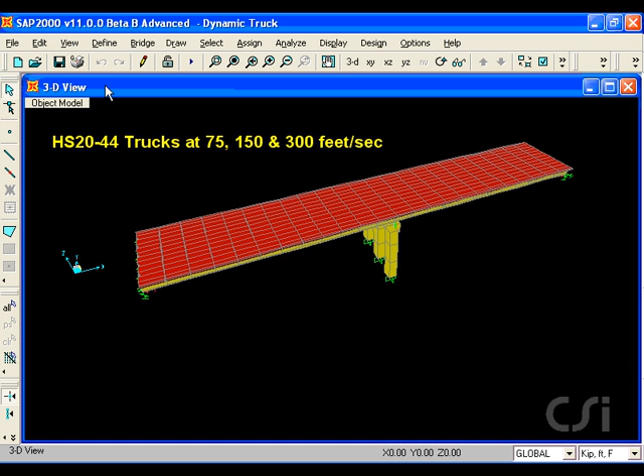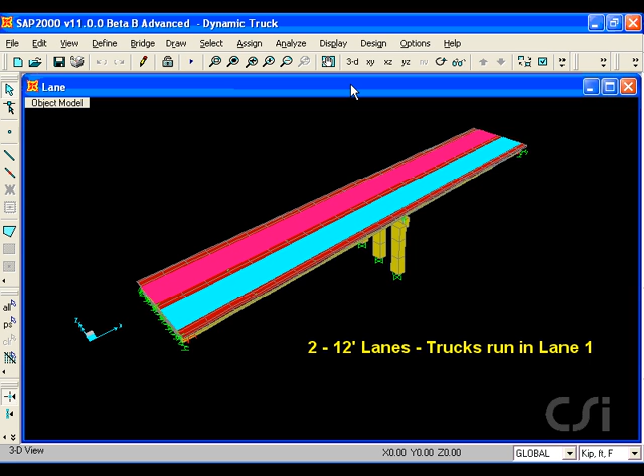This tutorial will illustrate how a moving vehicle can dynamically excite a bridge. We will run an HS20-44 truck at 3 different speeds to see the different responses. Our composite bridge is 2 spans, each with a length of 100 feet. It is 36 feet wide, constructed with steel girders, cross bracing, and a concrete deck. It has 2 12-foot lanes, but we will only load lane 1.

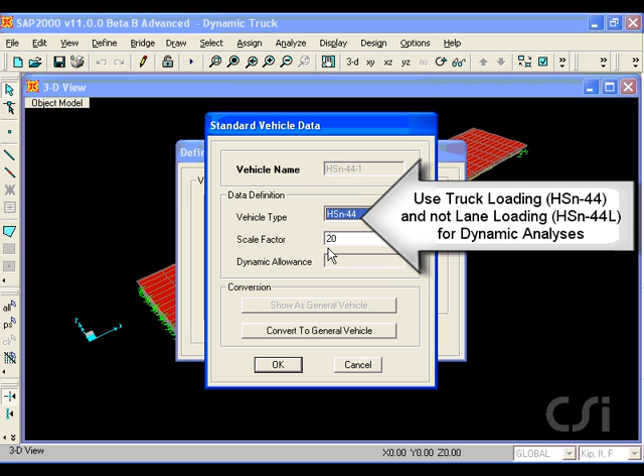We start by defining our truck. When using a vehicle load for a dynamic analysis, it is important to use a truck load and not a lane load. We next add our vehicle to a vehicle class.

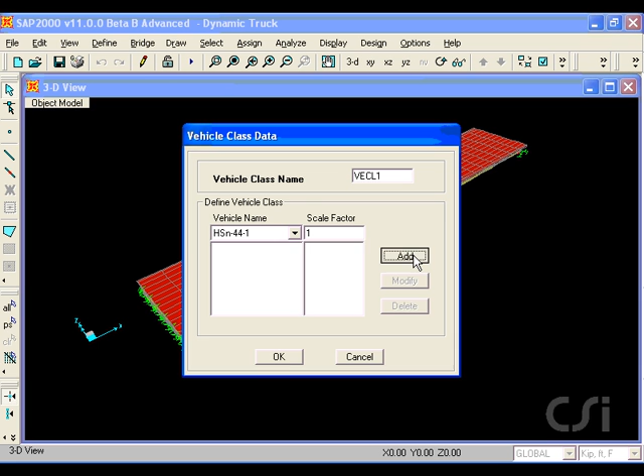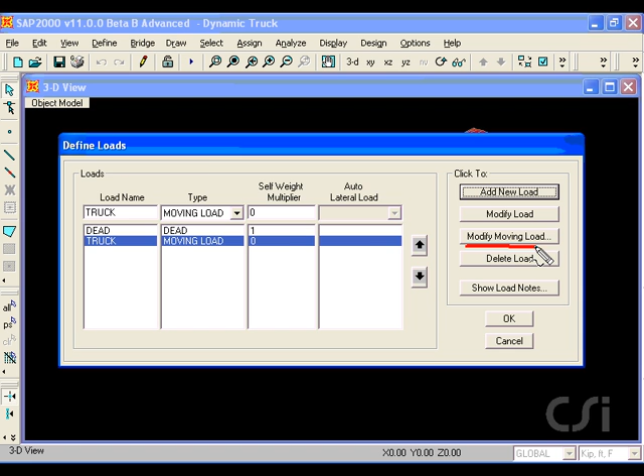Now we will define our moving load case, which we will call truck. Clicking on the Modify Moving Load button allows us to specify how the trucks will run over the bridge. Here we can specify the vehicle, the lane, the start time, which for the first truck will be 0, and the speed, which will be 75 feet per second for the first truck.

For the second truck, the start time will be 6 seconds, and the speed will double to 150 feet per second. For the third and last truck, the start time will be 11 seconds, with a speed of 300 feet per second. We are using speeds higher than typical to cause a significant excitation of the bridge. We will use a 15-second duration for the load and a 0.05 second step.

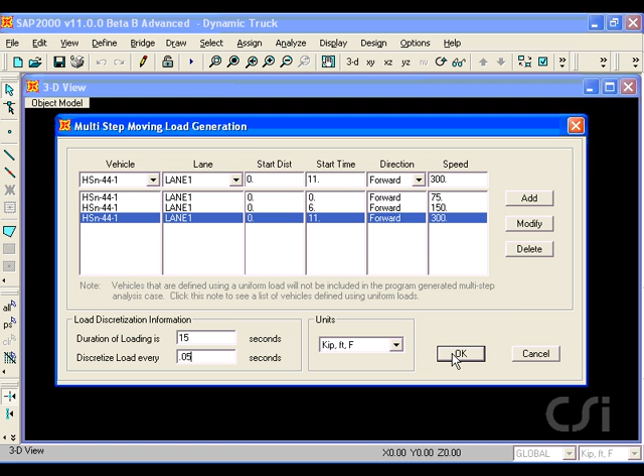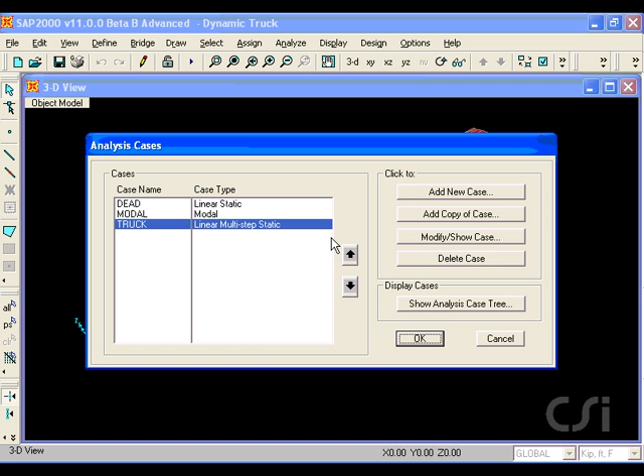The last step is to modify the analysis case. Note that a default case for truck was created as a multi-step static case. We will change this to a time history analysis so that the dynamic behavior will be included. We will leave it as a linear analysis, but change the time history type to direct integration.

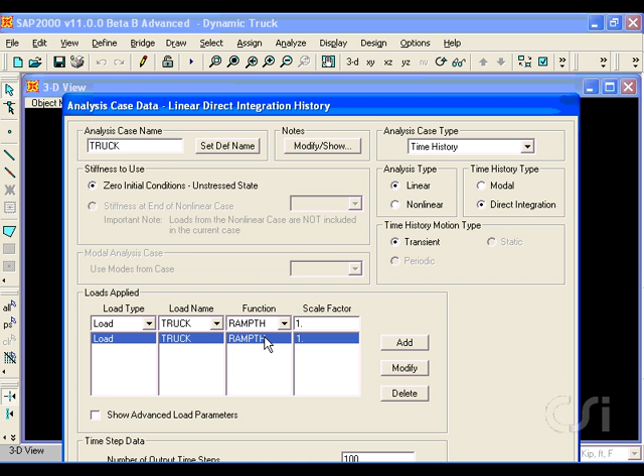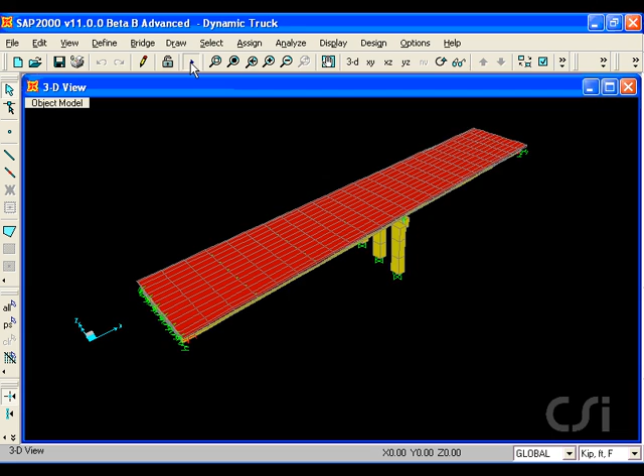The program automatically creates a default load application using a ramp function to apply the truck loads, which we will not change. We will ask for 320 time steps and a step size of 0.05 seconds. We are now ready to run the analysis. Note that the truck analysis case is now a dynamic case. We will shut off the modal case as we do not need any mode shapes for our analysis.

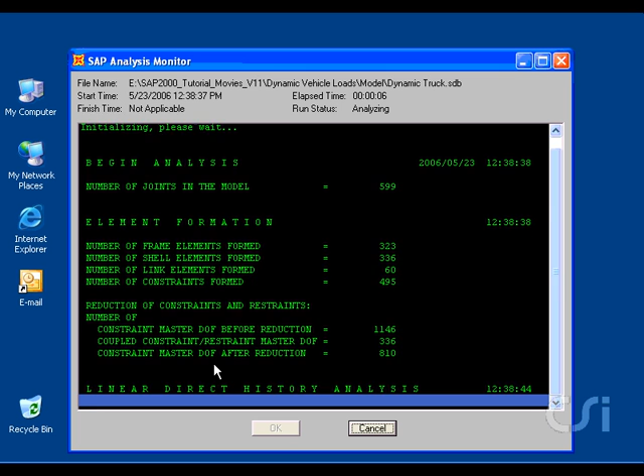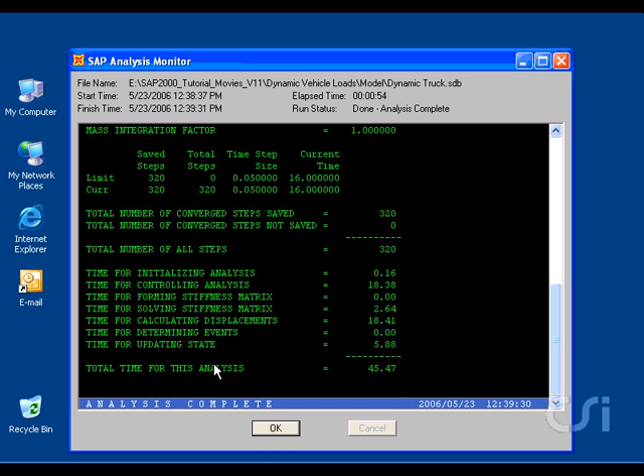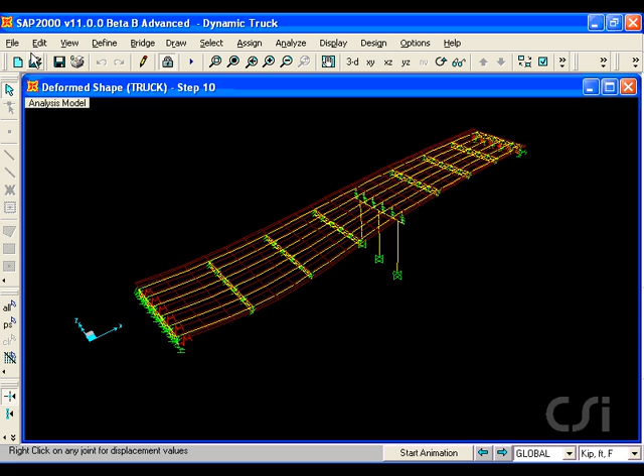With the analysis complete, we can display the deformed shape. In this case, we will show the shape at 1/2 second into the analysis. However, the dynamic effects of the vehicle loading can best be seen by creating a movie. Here, we will create a movie for the truck analysis case. And we want to make sure that the trucks are shown in the animation.

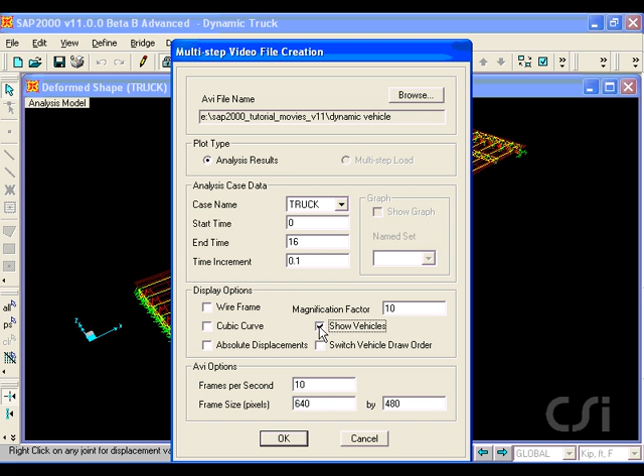When we play the movie, we see that the first truck has a limited dynamic effect on the bridge. And the second truck just slightly more. However, the third truck causes significant excitation of the first mode of the bridge.

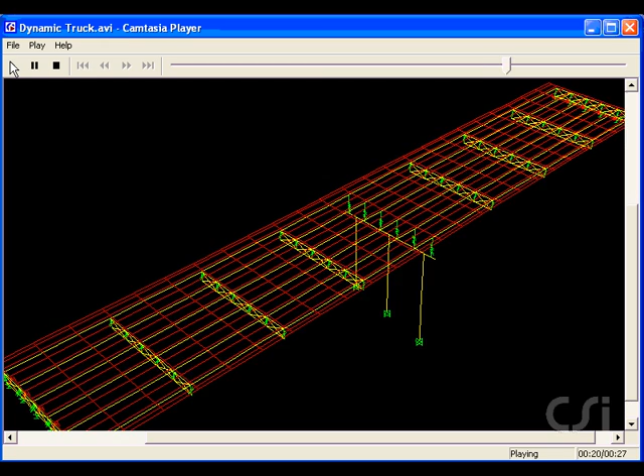Once again, the first truck at 75 feet per second, the second truck at 150 feet per second, and the third truck at 300 feet per second.

In conclusion, bridge structures may be sensitive to the dynamic effects imparted by moving vehicles, and SAP2000 offers a powerful and easy way to include and view these behaviors.